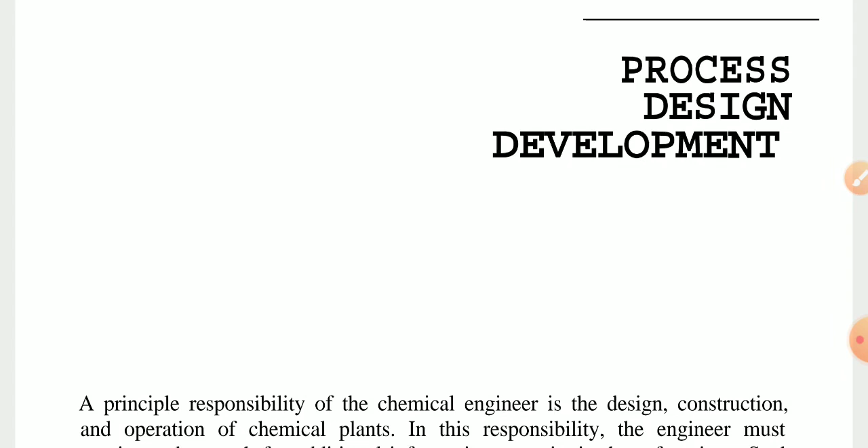Now we discuss today's topic: process design development, a principle responsibility of the chemical engineer, which includes responsibilities like design, construction, and operation of a chemical plant.

In this responsibility, the engineer must continuously search for additional information to assist in this function. Such information is available from numerous sources, including recent publications, operation of existing process plants, and laboratory and pilot plant data.

This collection and analysis of all pertinent information is of such importance that chemical engineers are often members of a number of consultancies or advisors, or even part of basic research teams developing new processes, improving, and revising existing ones.

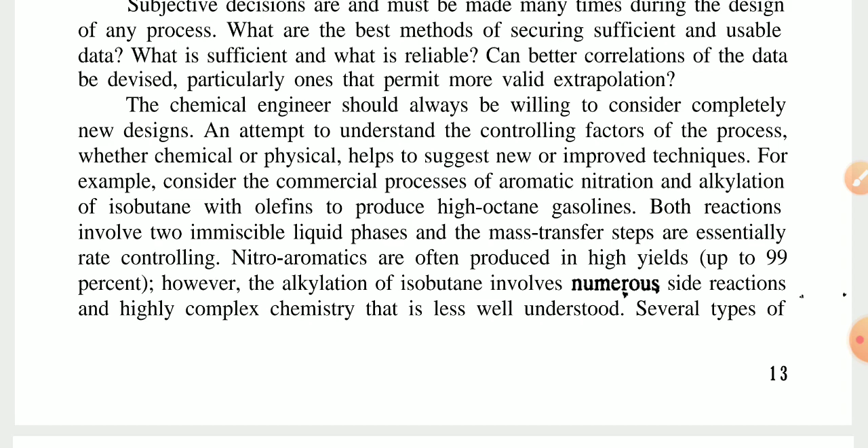Now, design project procedure. We will look at the types of design in detail: plant design, chemical engineering design processes, equipment, criteria for good design, process design, technical factors, legal factors, selection of a process, continuous versus batch processes, and the checklist for a pilot plant investigation.

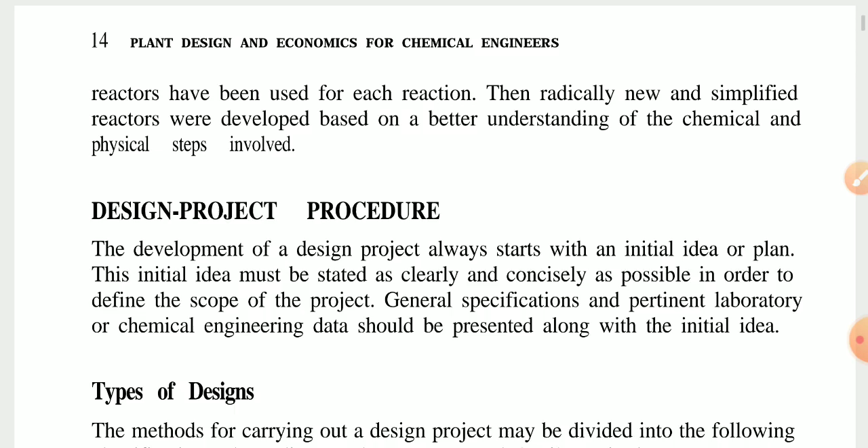Now we will discuss the types of design. The development of a design project always starts with an initial idea or plan, and this initial idea must be stated as clearly and concisely as possible in order to define the scope of the project, and general specifications are prepared. Some laboratory work or chemical engineering data should be presented along with the initial idea.

Now, the types of design: the method of carrying out a design project may be divided into the following classifications, depending on the accuracy and detail required. We will look at these in detail.

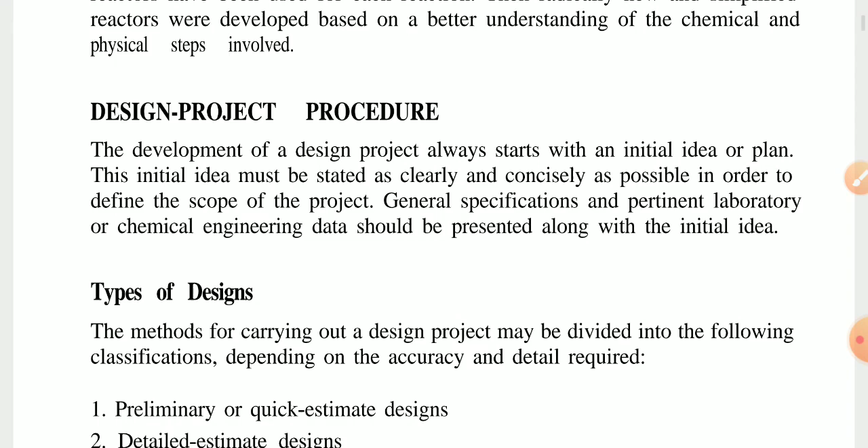Types of design. The method for carrying out a design project may be divided into the following classification depending on the accuracy and detail required. First one, preliminary or quick estimate design, detail estimate design, firm process design or detailed design.

Okay, now continuing this topic, the criteria for good design, and we will look at the technical factors for process design on that basis. Batch versus continuous process, shift and operating schedules, types of flow diagram.

Now the simple discussion part is detail estimate design and firm process design or detailed design. First we will discuss the initial work, how we can plan it at the start.

These are ordinarily used as a basis for determining whether further work should be done on the proposed processes. The design is based on approximate process methods and rough cost estimates are prepared. Few details are included and the time spent on the calculations is kept at a minimum.

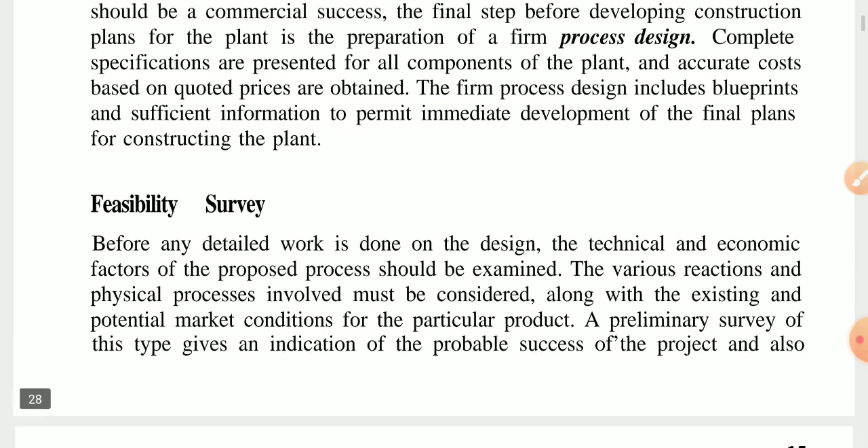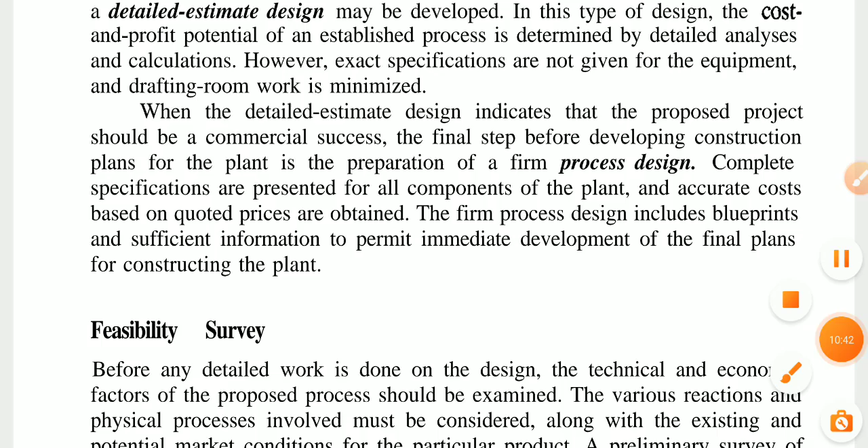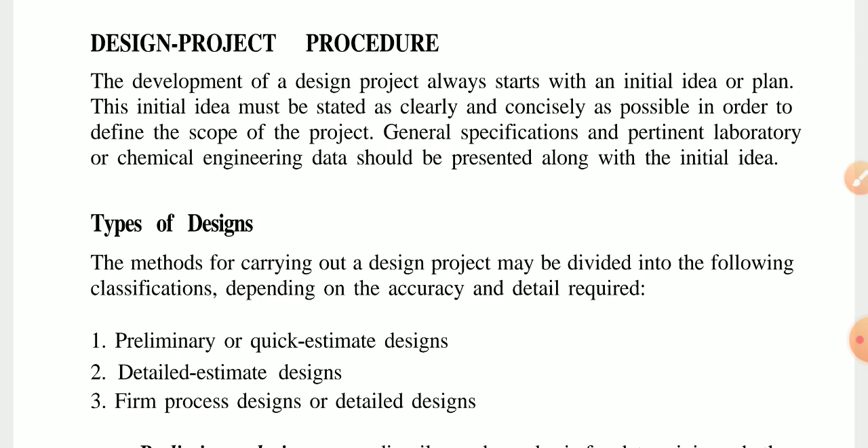Okay, so simply the types of design. The method for carrying out a design project may be divided into the following classifications that we follow, depending on the accuracy and detail required. How the initial work is done: preliminary or quick estimate design, detail estimate design and firm process design, as we saw.

The initial work is ordinarily used as a basis for determining whether further work should be done on the proposed processes. The design is based on approximate process methods and rough cost estimates are prepared. Few details are included and the time spent on the calculations is kept at the minimum. A detailed estimate design may be developed in this type of design, with cost and calculations. However, exact specifications are not given for the equipment and the drafting room work is minimized.

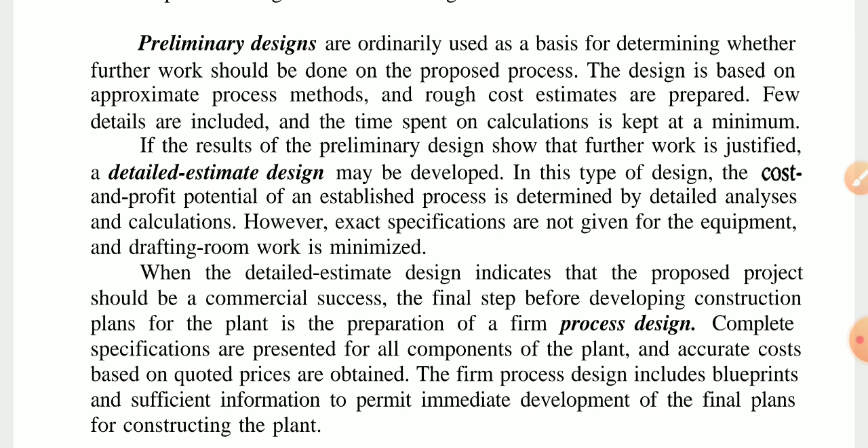And when the detail estimate design indicates, on the basis of the processes and project work, a commercial success, the final step before developing the construction of the plant is the preparation of a firm process design. Complete specifications are presented for all components of the plant and accurate costs based on quoted prices are obtained. The firm process design also includes the blueprints and sufficient information to permit immediate development of the final plans for constructing the plant.

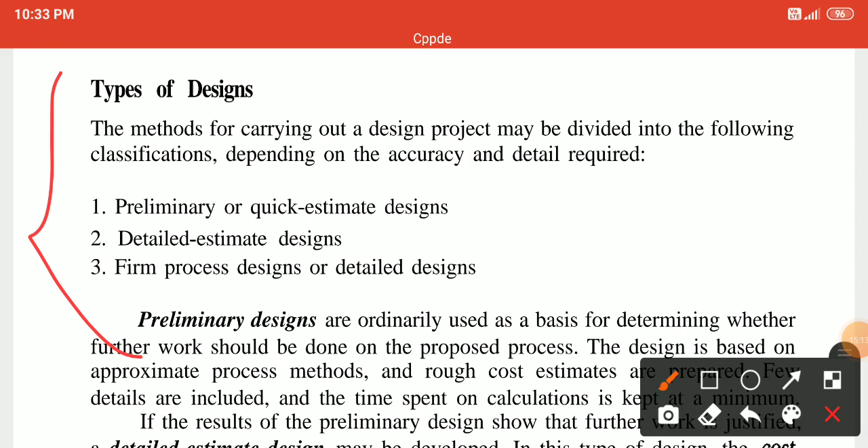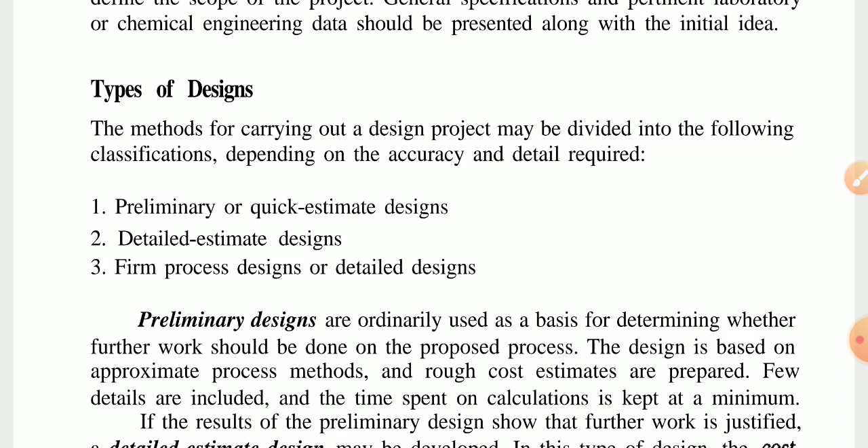Okay, this is a simple discussion part for a development plan.